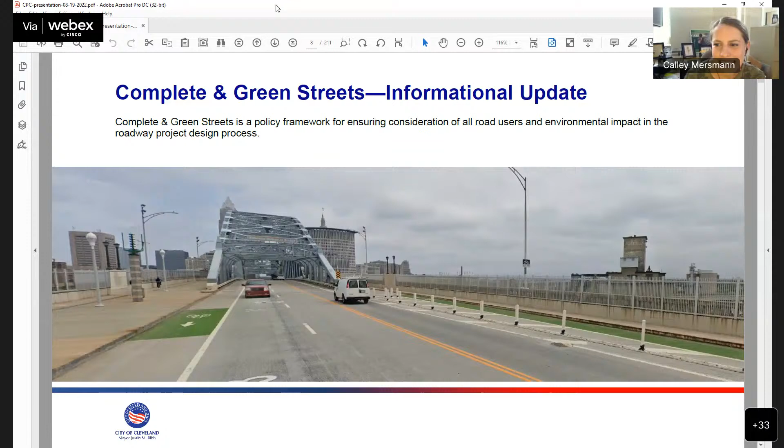So this reviews the elements. Go ahead to the next slide.

Madam Chair, I'm not seeing the slides. It must be you because I see them. I think everybody else does too. Anyone else? It might be just a setting from how you're viewing it. Okay, thank you.

As a continued refresher, the main change in this updated process is that we're bringing conversations about desired project elements and an interdisciplinary review process to the front end of the process. This is before project scopes, budget, or funding strategies are set in stone, which allows us to consider desires and determine what can realistically be accommodated in projects.

This process also adds transparency and understanding through advisory committee input. That's the TAC review that you see in the process. We'll be publicly posting any exceptions to TAC recommendations and reporting on outcomes at the end of projects. You can go to the next slide, please.

Rick mentioned the interdepartmental conversations we've had over the last two months since the legislation was passed. Using insights gained from these staff discussions and the direction established in the legislation, the directors of capital projects and city planning have posted a first version of our Complete and Green Streets administrative policy to the city planning website. We plan to review that policy with the TAC when they are convened. At this point, it's considered a draft, to take in their recommendations as well as continue to build on this policy as we develop and initiate the new process.

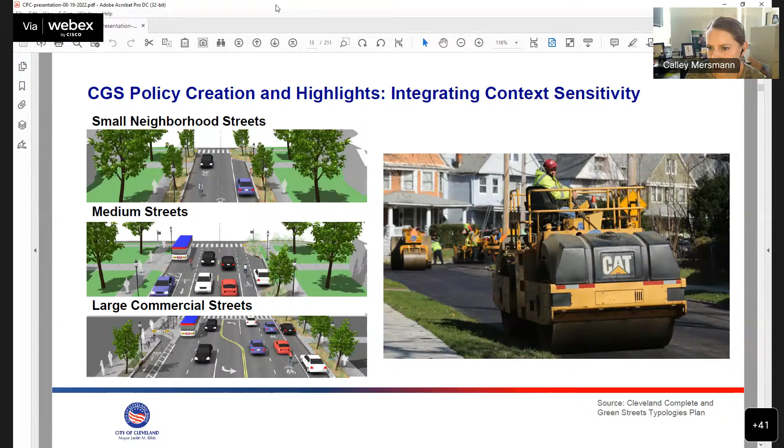The Complete and Green Streets policy in its draft form identifies roadway projects on collectors and arterials as where we have the most opportunity to see transformational complete and green streets elements. These are the streets that tend to be transit priority corridors, the ones where we want to see enhanced separated bicycle infrastructure, where there tends to be the most pedestrian volumes and the most serious safety concerns in terms of our Vision Zero analysis showing serious injuries and fatalities.

So our strategy here is to leverage the limited local dollars that we have for state and federal funds that can cover our objectives and enhanced elements we desire. What we've discovered through this process is over the last 3 to 4 years, Cleveland has had between $16 to $24 million of local funds annually to invest in our roadways. About half of that, or 12 million, goes to residential resurfacing that I just talked about. So that leaves us with an average of $5.7 to $6 million in local funds each year to leverage for these state and federal grants.

So having conversations early helps us inform project scopes, develop funding strategies, and try and leverage those dollars as much as possible to see the elements that we wish to have. Next slide, please.

So this is the final slide, just with some highlights from the website. We would love for you to go and nominate residents. I do want to say that this updated process mostly impacts projects going forward. So street projects that are already under design with set budgets or approaching construction, our opportunity to make adjustments there is very limited, but we look forward to implementing this improved and new process for projects going forward.

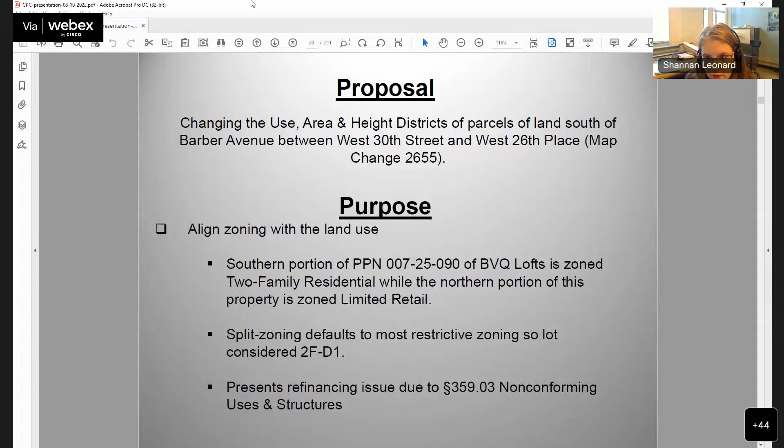So the entire lot is actually considered two-family D1. And this presents a refinancing issue due to our non-conforming clause in 359.03 of the zoning code.

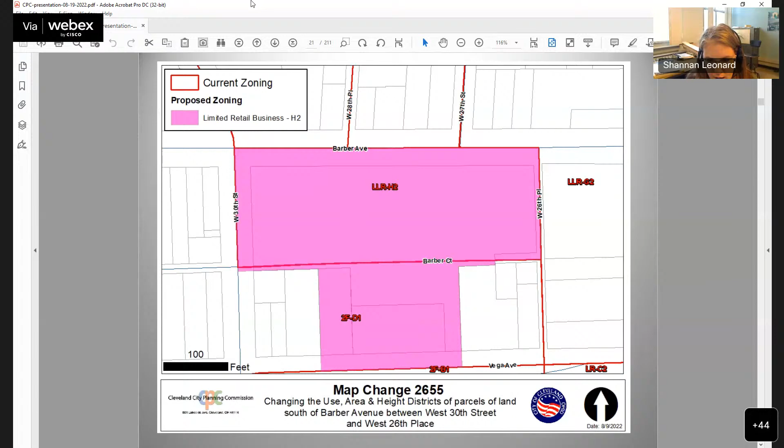Next slide, please. This is a really simple rezoning, and I'll walk you through the history of it that came to me through Councilman McCormick's office and Mr. Beckham, who is in charge of the Queen Barber Vega lofts. They are having a financing issue because the zoning is defaulting to two-family, and they had redeveloped this historic bakery into multi-family loft apartments a few years ago. Now they're struggling to actually get refinancing done. So we're proposing to make the entire lot limited retail business north of Barber Court, which has now been vacated.

Next slide, please. As you can see here, this is the current zoning. To the north of Barber Court, which is now vacated, is limited retail, and to the south is two-family D1.

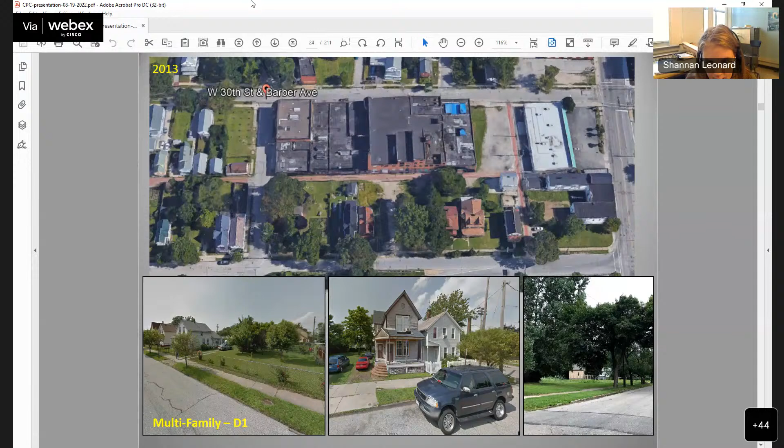This was what it looked like back when we did the rezoning in 2018, 2019, as well as what the building was -- vacant back in 2013. This development group came in and redeveloped the building and put in apartments at this location.

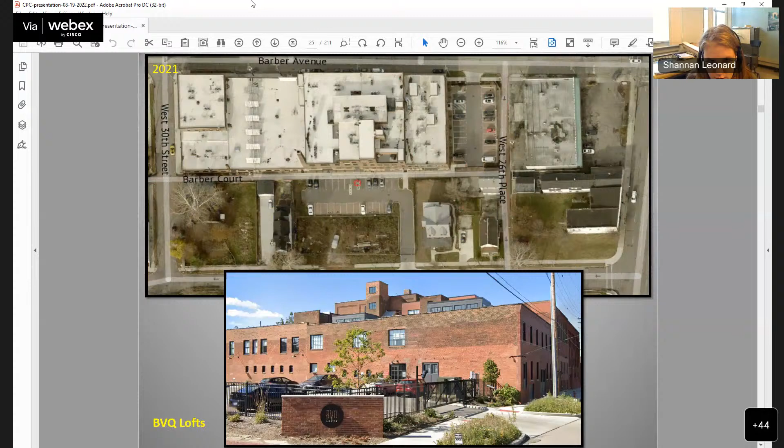Next slide, please. This is the current conditions in 2021. These are the BVQ lofts. You can see they redeveloped the building into a multifamily. Next slide, please.

Next slide, please. This is the proposal. We're proposing to change the two-family area to match the limited retail to the north, so that Mr. Beckham and his group can get the refinancing they need for this location. You'll notice the 4 parcels immediately east of West 30th Street are owned by Mr. Kennedy. I spoke to him on the phone. He was notified, as well as Miss Rosa immediately to the east, as well as the properties two properties past West 30th Street -- all were notified of this proposed rezoning just to align the land use.

Thank you. Is anyone here representing the property owner or the councilman or anything like that?

Madam Chair, this is Ben Beckman. I'm joining by phone due to some computer trouble. I don't know if you can hear me. I represent the developer group. I'll be brief. I want to first thank you and the commission for the time. I also want to thank Councilman McCormick, his assistant Katie Huff, and Shannon Leonard for tremendous support in getting this before you quickly. We really appreciate that.

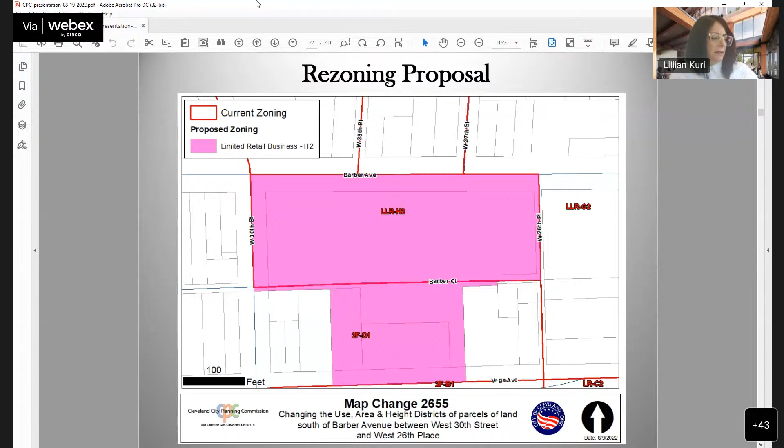I think then the next item is lot split and consolidation for permanent parcel number 002-05-030 and 031. This is at West 73rd Street. Joe, are you here to speak to this?

Yes, I am. Good morning. How are you? Very good. Thank you. Good. All right, so I'm actually in the video. Perfect. Good morning, everyone.

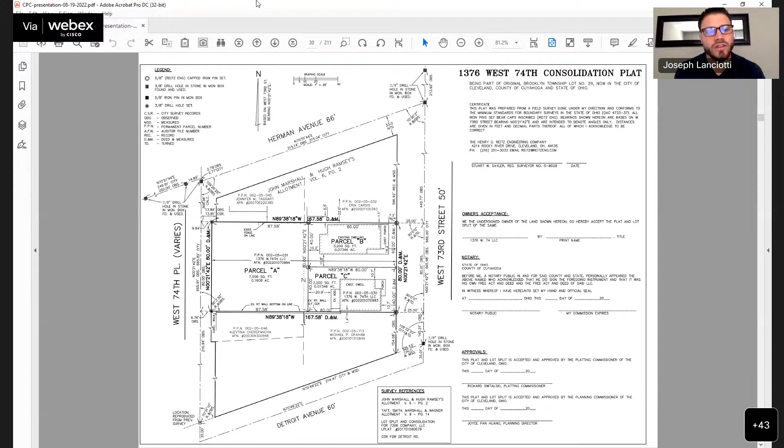So what we did here was, if you could see on parcel C, that is a single family home that we had purchased. Parcel B is a duplex that had an L-shaped lot with an 8-car garage on parcel A. What we did was we tore down that 8-car garage and we're looking to get a subdivision to redevelop that 7,000 square foot lot there. It actually makes the parcel of the duplex, parcel B, a little bit smaller, which is why we are here today. So that is the aerial view. That is the 8-car garage that we had removed.

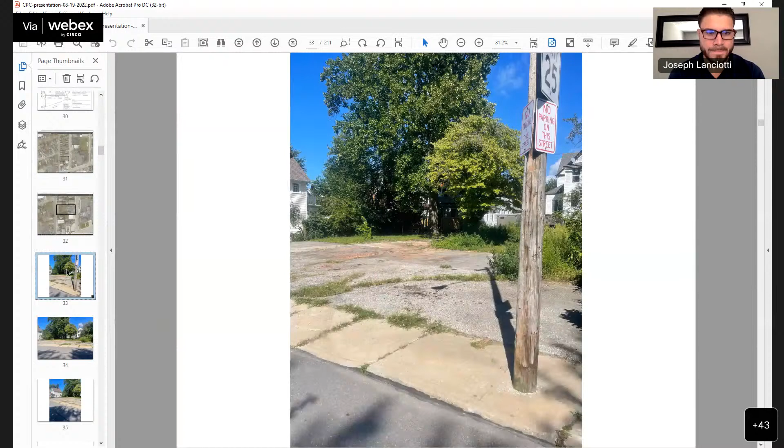Can you describe, though, for the two existing houses where their driveways and parking will be? Sure, the two existing houses, it's actually a shared drive. It's a very wide shared driveway. Nothing will really change there. And where do they park? Right between the two houses here. It's a shared driveway for the duplex on the top, and then the single family on the bottom.

What we are proposing is a 4 townhome development with adding a shared driveway in the middle of that as well, which is going to be called West 74th Place. That was actually proposed a while back. Have you created or submitted the requirement we have, that you sort of deed for the two existing homes the maintenance and access on the shared driveway, and snow removal, et cetera? Has that been done?

No, it has not. Well, this currently is not a shared driveway. There's actually a parcel line there. So there are 2 driveways that butt up against each other? Yes. How wide is each one? Each one, I believe, is around 10 feet wide. So it's not a shared driveway? No. Okay, confusing. So, yes.

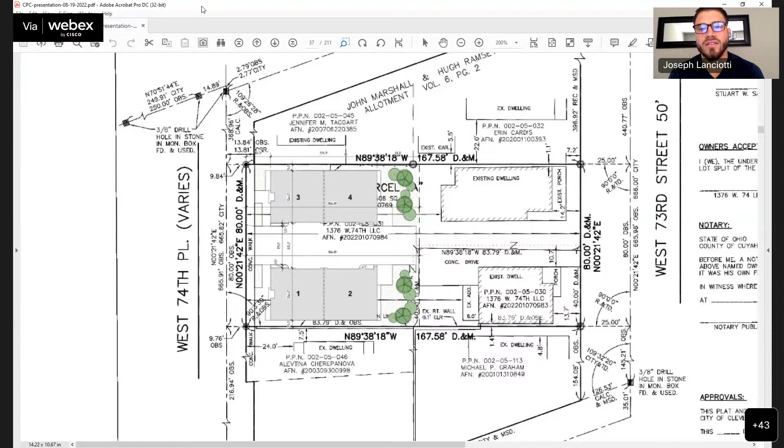Thank you. And is this also using the townhouse legislation? Yes, we will be going through all of that. We're just still in the process of trying to get everything completely off of this duplex, because it's currently one parcel, it was one L-shaped parcel. So we had to actually tear down the garages prior to seeing exactly where we'd put all the lines and everything.

Okay, I think it makes sense. I'll be honest, I think a lot more work should be done in terms of the site plan that makes sense to us. I'm sure you're going to come back. Pedestrian access to the unit 4 and 2 - there's a whole host of things in the townhouse code that I think you need to work on and detail out that I don't see here.

I would say if commission members are going to make a motion, it should be with clarity that the site plan itself needs a lot of work and needs to come back. Madam Chair, therefore I will move to approve presentation as submitted, with the caveat that the applicant work to come up with a dignified and engaging way to separate the two drives, with the intent of providing safe passage for pedestrians.

I'll second that. A motion and a second. Any other comments or questions? I do think you can work with staff, they're really good and they'll help you. I would suggest working with the planning staff as you proceed. But I know you need this to be able to proceed, so we understand that.

Okay, anyone else? Okay, well let's call the roll. Downing, yes. Fluker, yes. Curry, yes. McCray Scott, yes.

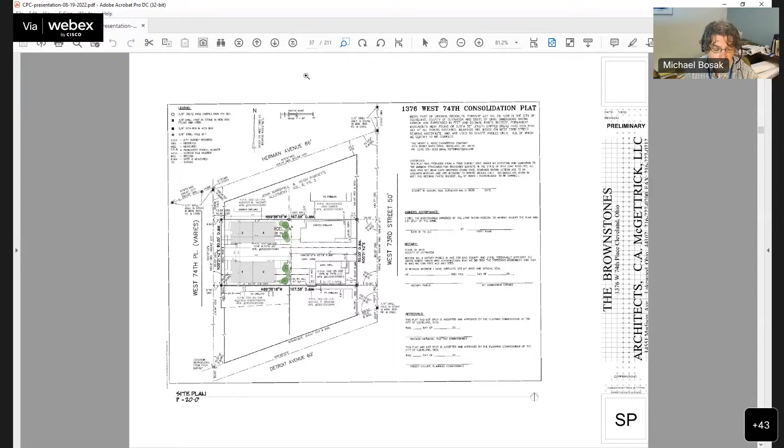Okay, motion carries. Diane, you must be inside something with a really big echo. I don't know what it is. I apologize, it's okay.

Southeast Design Review. This is T-Mobile new signage at 4071 Lee Road. This is seeking final approval. I will note that the Design Review Committee disapproved this unanimously - it did not meet the standards of the Lee Harvard Plaza sign and guidelines that were adopted by the Planning Commission.

I will ask first who's speaking to this matter, everyone who will be speaking, Kathy and everyone else, because I'm going to swear you in. Who's here to speak to this matter? Kathy Clark. Anyone else with your team or just you? No, just you. Do you swear to tell the truth, the whole truth, and nothing but the truth, as you shall answer to the penalty of perjury? Yes. Director, would you like to let the presentation go first or make any comments?

Yes, let's have the presenter go first. Thank you. Go ahead, Kathy. Maybe you could focus on what you think the local design review, what elements did or did not meet the guidelines. The only element that did not meet the guidelines - the size is fine - it's just that back when they did the building, the first sign plan required channel letters only. So that was why they disapproved it.

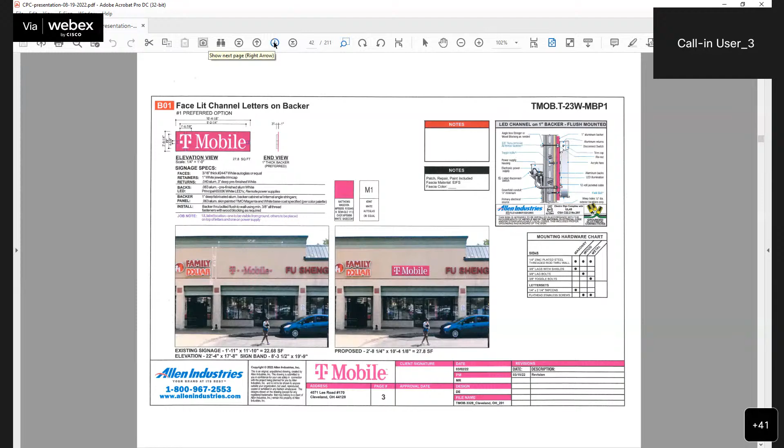Okay, Commission members, any comments or questions or thoughts? Madam Chair, I apologize to interrupt. Marka Fields, Assistant Director who's still overseeing Southeast Side, has her hand raised. Okay, thank you. Go ahead, Marka.

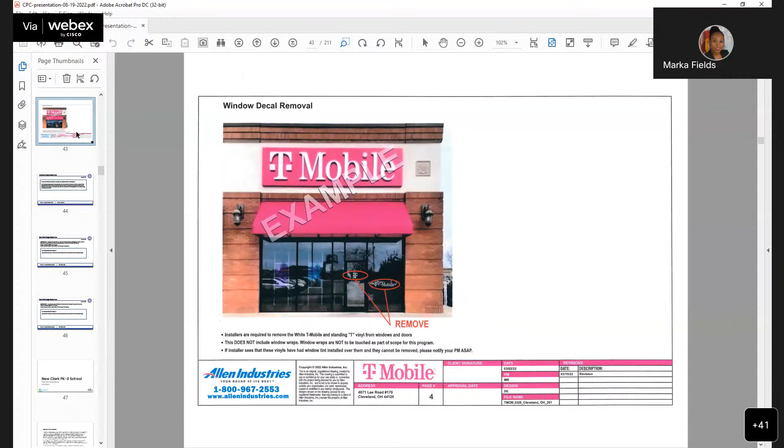Yeah, so in regards to the Family Dollar sign, that one I think was given a variance, and the reason is because even though they weren't individual channel letters, they were kind of cut around the letters so that it kind of mimicked the feel of individual letters. So they did approve that one. That was approved by Planning Commission, I forget, several years ago. But I think what they're trying to prevent is having several different sign types within the plaza.

If you look at the plaza next door, which I don't have a picture of right now, everybody has a different type of sign and there's no consistency throughout that plaza. They're trying to prevent this one from doing the same, which is why they said no to the sign that they're presenting, because it actually looks a little bit more like a cabinet sign. Thank you.

Anything else before we open it up to the commission? Have we heard from the councilman? We have not. Okay, commission members.

I guess, and again I'm not trying to re-engineer this, Madam Chair. Is there a way to do this without having the backer board? In other words, can they apply something to the backside, like a film, to the actual wall, and then attach the channel letters so they stand proud and appear to be? I don't want to contradict signage requirements, but I think there's a solution here to achieve it, and I don't think this is it.

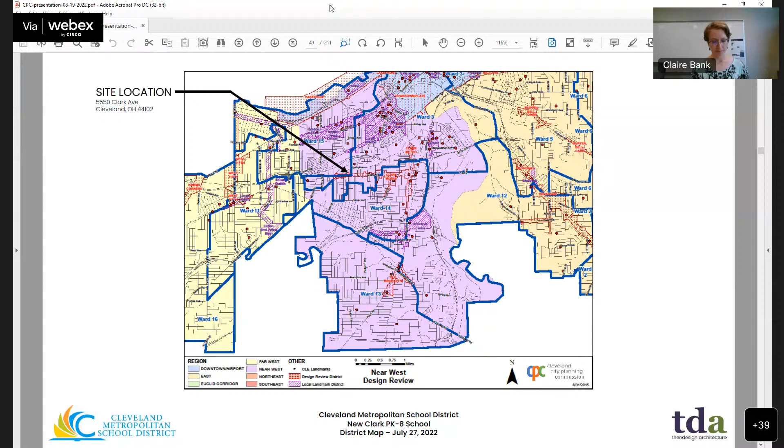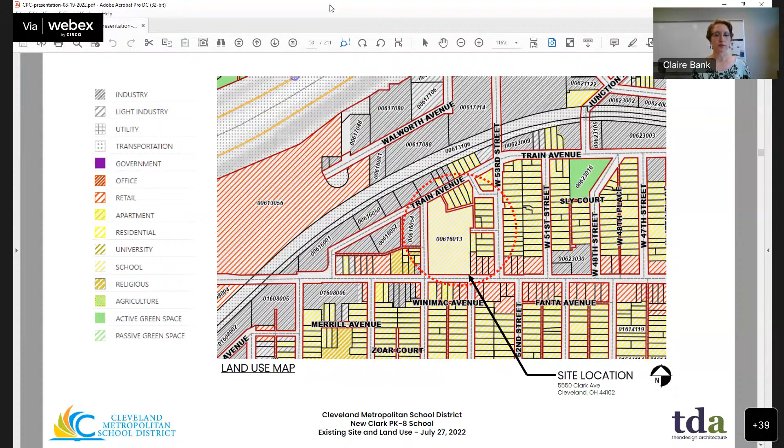Zoning is zoned for both 2-family residential and retail along the frontage, circled here in the red circle. Along the front of Clark Avenue, there is a retail overlay, and we'll show how we responded to that and some of what we did in response.

I know it's text heavy, but I also knew you'd have it before, so I apologize for that. There are a few things on our radar we know we'd need to draw attention to, as far as items that are a little different in our response than the retail overlay. One is setback from the right of way. We know the max setback there is 5 feet. We're holding back 12 feet in response to a planned multi-use trail that some of the city planners made us aware of.

There's also a higher percentage of glass if you're really looking at retail use versus a school than what's safe to provide in a school setting, so we will show what we did there. The main entry was placed where it is for a good reason, as far as site circulation and where students and staff will be coming from. That was one item design review also asked us to investigate more as we move forward, addressing the street a bit more. We've already planned to seek conditional use since it's been a school for a long time, but zoning doesn't align with that.

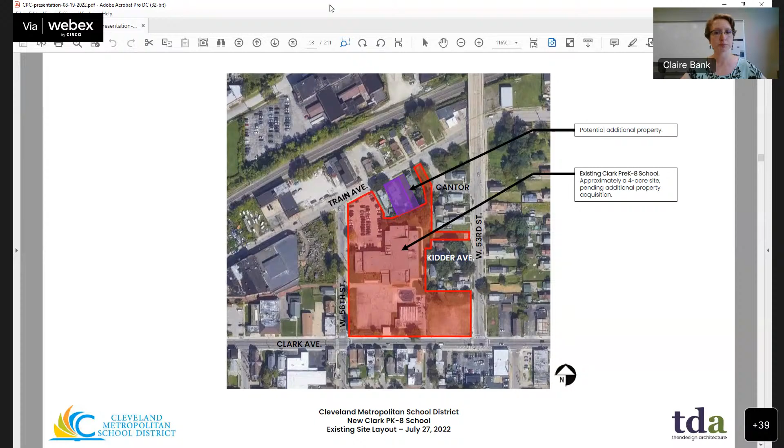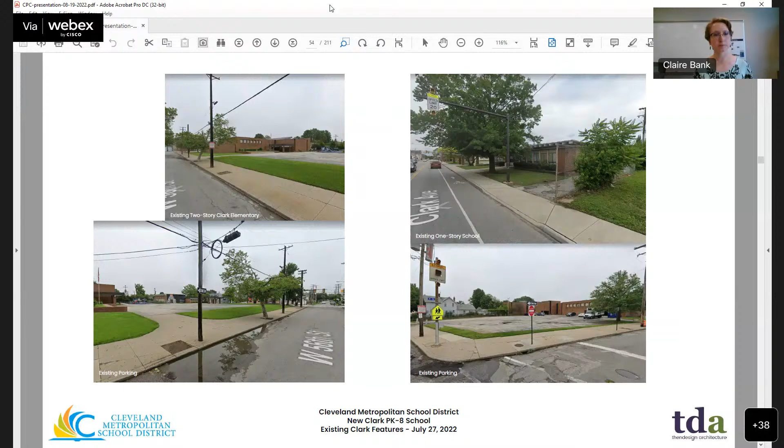These are just views of the existing building. On the left, two images, you can see that paved area and the school in the background. The paved area is also where the old Clark, before this current Clark, sat. So we're doing some additional geotech investigation there to see if anything is living underneath that paved area. And on the right, you see an image of the annex building and also the parking lot in the back.

You can move through a little bit more quickly than design review. Okay, we trust them. We just really need to see the whole thing.

So then this is the proposed site plan. To walk through it fairly quickly here, the driving factor was putting everything in the right adjacency for interior and exterior programming. So one of the first things that drove where we placed the building was that retail overlay along Clark Avenue and defining that street corridor along Clark as you go towards Cleveland. So we placed the academic bar towards Clark because that's one we can really activate more with how we place the fenestrations, and we can break up the scale of the building there, but also define that street edge.

If we put the gym there, that's a little bit too blank of a facade. And if we do food service or something else like that, we start getting mechanical type uses along the front, which we didn't want to do along Clark Avenue.

There's a lot tied to interior programming. So the pre-K and K play area has to be attached to the pre-K and K classrooms. The larger play area has to be attached to student dining. So those types of exterior programs landed where they did in relation to the interior program on site.

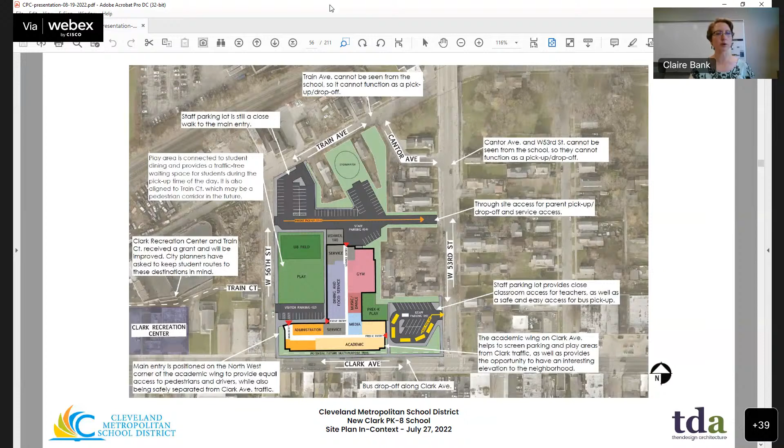The main entry, just to draw attention to it here, is facing north. It's facing towards where the visitor parking is happening, where all the student pickup and drop off is happening, and where staff would be coming from. But staff would also have keys and could use other doors to get in and out of the building.

Next slide. This one we can kind of jump over—we just talked through it on the last one.

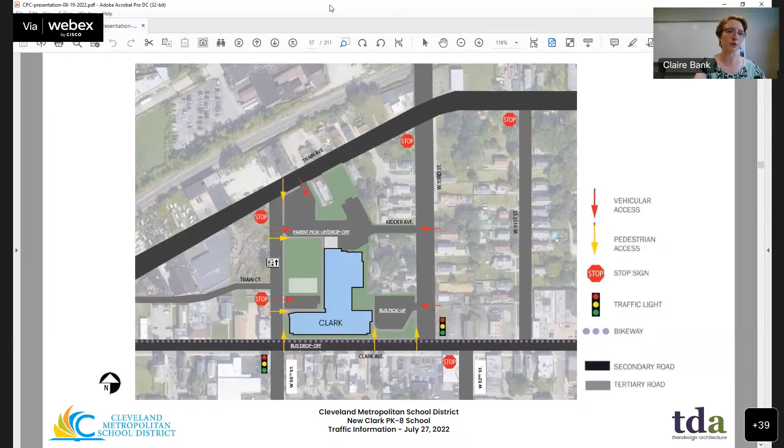These are just the floor plans, we'll go through them quickly. The main thing is you've got a 3-story academic wing along Clark Avenue, and all the programming in that northern bar is meant to also be used after hours by the community—student dining, gym, and media center—and it's totally sealed so you can easily close it off from the academic wing for security reasons after hours.

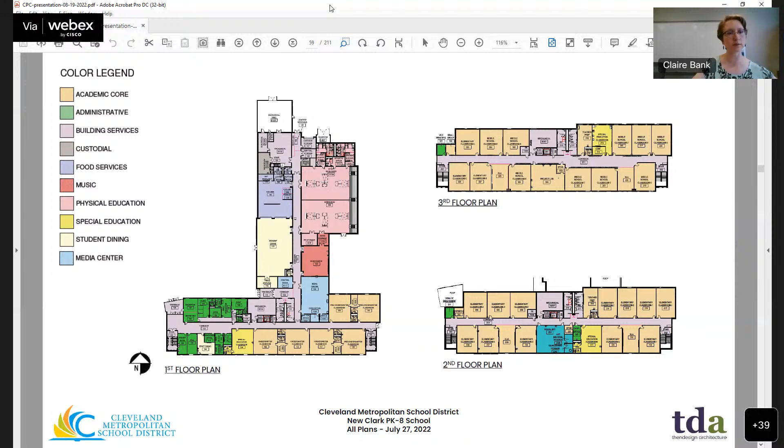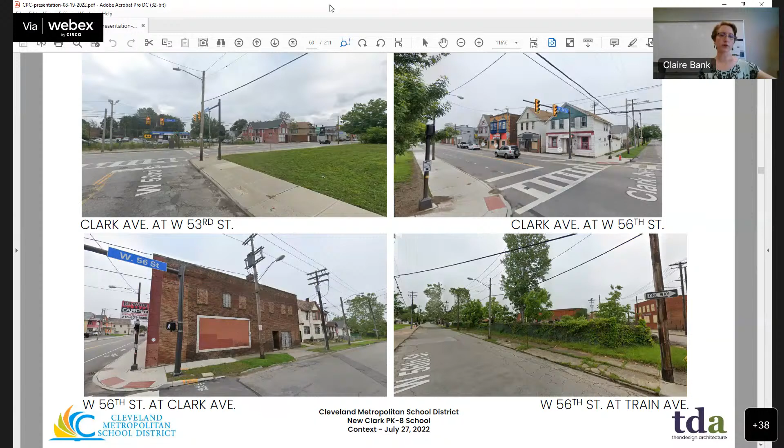Next slide. This is just context, so you can see what's surrounding the building. There's a lot of different materials and colors around the site. On the school itself—we didn't include images of this—there are a couple existing murals, and the principal has a good relationship with a graffiti artist who has done some really neat pieces within the school.

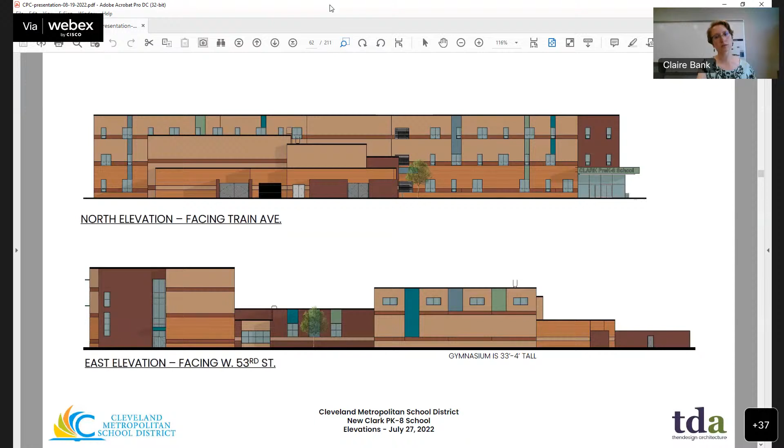One more slide—this is looking at the northern elevation. Here you're getting a clearer view of the main entry and visitor parking, and a glimpse of where the play area is. In the middle, where the two buildings meet, that's more of an event entry—so if something is going on after hours, that's where people would go in for use of the gym, student dining, or the media center.

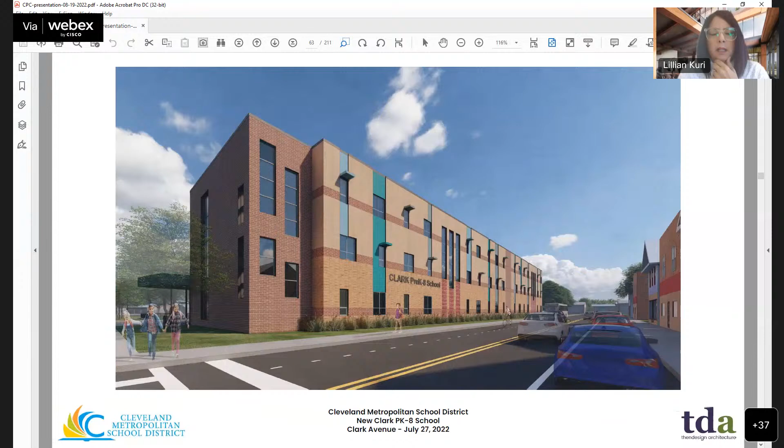Thank you. We're going to take two motions—one for the demolition, and the second, it says on my agenda, is conceptual approval for the design. Is that correct? I'll leave it to commission members if they're comfortable with the design, or if they want to leave final approval to local staff. Let's see, the director has her hand raised first, so go ahead.

Thank you, Madam Chair. As the applicant discussed, this will need to come back for conditional use approval for the PRO—that was an administrative oversight and should have been posted as such. So the applicant will need to come back at the next review for conditional use approval. And the conditional use is for the drives?

If I could have Shannon unmute and speak to the PRO, that'd be great. Yes ma'am, Shannon Leonard. So from what I can see here, they would need a conditional use for the institutional use and a pedestrian retail overlay, and also for the no main entry on the pedestrian frontage. I believe those are the two. I didn't see a driveway across a public sidewalk, but it may need that as well. I haven't done a formal PRO review here.

Okay, they'll need to come back to get the conditional uses. We normally take the PRO first and or in tandem with the design. Right, so okay, well I mean I think we have some latitude. We can also leave it to staff unless you can't come to agreement on the PRO as well. But first let me hear from the commission members about the design or any questions or concerns.

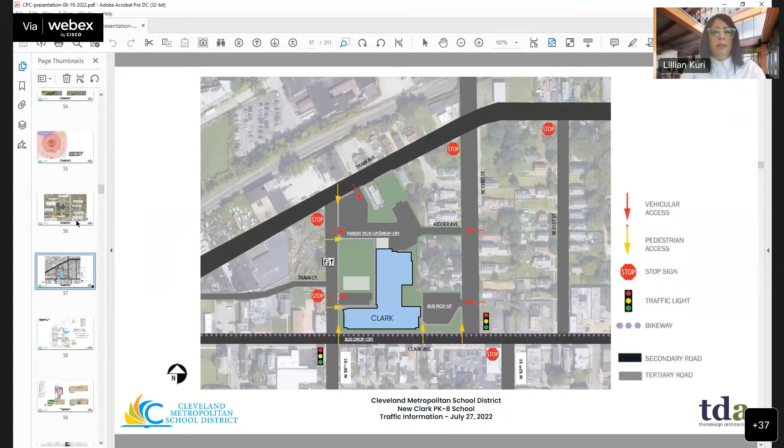My sense on the design review, the conceptual design review and the PRO, is that we ought to do them together. If we're comfortable, they're not going to change the orientation of the building if we give them conceptual approval and the program. So to my commission members, either we address some of the issues now, or we may move the design and have them come to staff for the rest. So I'll leave it up to you, or see if there are any questions about that.

Anyone have any design concerns or anything they'd like to raise? Okay, so can I have a motion on the design portion?

Madam Chair, I guess I'm not totally clear here, if I may ask a question of you, about what we should do. PRO and design, if there's something that needs to change, or if there's a variance required, then they would have to come back, and this may impact what we see here, correct? Well, what I'm saying is we're comfortable with the way this is sited and the design, right? How it faces Clark, and how the entrance is sort of off 53rd at the corner there.

The main entrance, not completely facing Clark, which is part of the PRO. If we are giving conceptual approval to the design and the layout, in effect, we're okay with the variances that are required in the PRO, is what I'm saying. So we either have to table this and have them both come back together, or we like the design and we're comfortable with it, which in effect means that we're okay with the variances that are required by the PRO.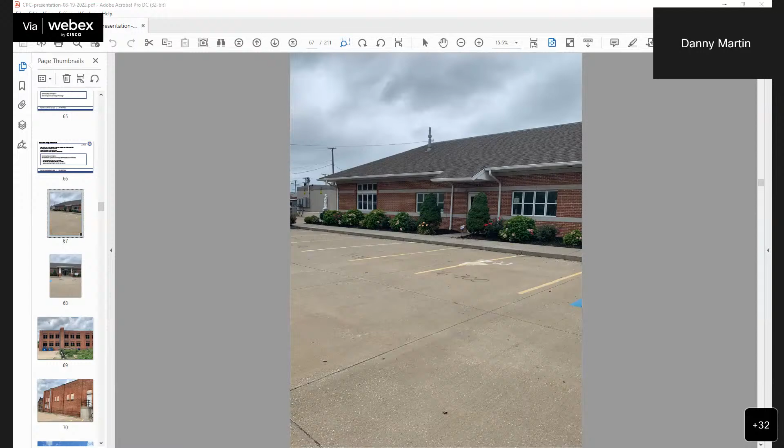Okay, so are these the images? So this first image is the existing pre-K building that will stay and that we'll add on to. If you go to the next one, you'll see the front of that building. I don't want to get into the new design, but if you keep going, you'll see the old school building. Here's the back side. You can scroll through it.

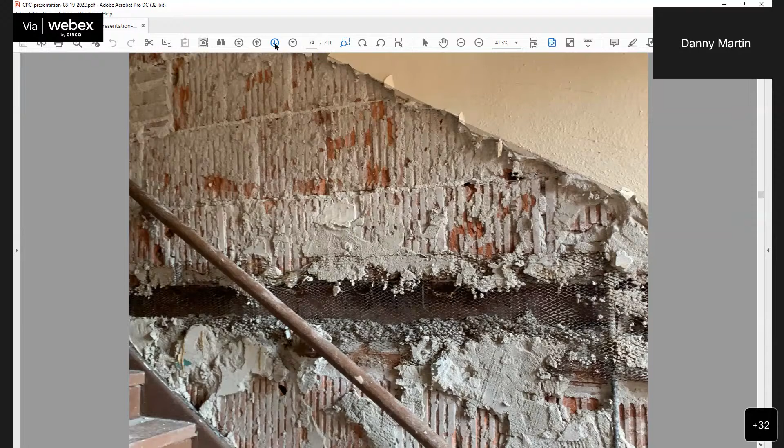So this would be the building that we're taking out. The way this building is positioned, it's right in the middle of the lot. So when we take it out, it'll really open up our lot to create more play space for the children, better situations for parking, for school drop-off and pickup.

As you can see, the damage is very extensive throughout the building. This is a 1930s style building.

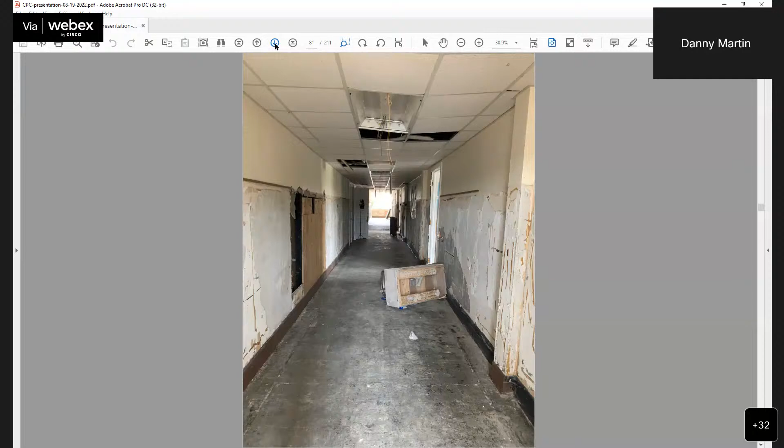I'll move approval on the demolition. Downing. I second, McCray Scott. Motion and a second. Any comments or questions? Okay, call the roll. Downing, yes. Booker, yes. Kuri, yes. McCray Scott, yes. Slife, yes. Motion carries.

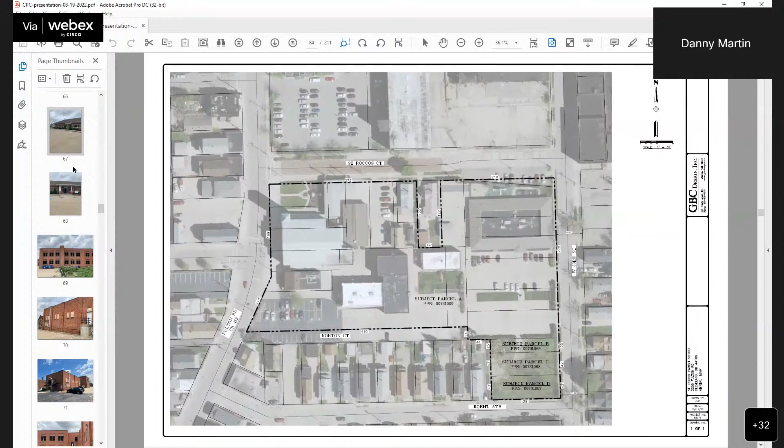Next item, is there another piece of this one? Yeah, so let's see, so this would be, all right, so for the schematic design, that was presented to the design review board. They had some additional comments, some changes, which we are working on and adding those in. I don't have those drawings available, but I imagine John will bring those back to you guys for further approval.

Alright, so I'm confused. Do we need to table this to the director then, since we don't have the drawings? I believe we do have the slides. Maurice, if you go further down past the demolition. So while he's doing that, this is the schematic approval, that's right, design approval. If you can go to the next slide, that's existing. Keep going. There you go. Thank you.

Does someone want to walk through this, or do we need to table this? Yeah, no, I can walk through the schematic design. I'm glad these are in here. As you look at the drawing, basically where the new parking is shown, kind of in the middle, that's where the old school is demoed and removed. You can see it really opens up the lot there. The layout then, up in the upper right-hand corner in the lighter tan, that's the existing pre-K building. And the darker tan color, that would be our new addition, including additional classrooms, the gymnasium, and the cafeteria. So that's the layout that we presented. It's just a schematic design. We're still working through a lot of the details to finalize that, but this was approved.

Okay, can you go back to the site plan for me? Any comments or questions from the commission? I have to be honest, I think that the West 33rd, the front facade if you will, from the street, is that 33rd Street that I see? I don't know the street well, is that a heavily trafficked street? No, it's residential on the other side of 33rd. The main entrance is off of Fulton. On the residential side, I guess my question, are those single family homes across the way there?

I do worry about the entire length of that wall along 33rd, if that is a residential street with houses and single family lots. As you go into the next level of design, there needs to be a lot more fenestration and care, since these are 40-foot Cleveland lots, and that's a pretty long, harsh environment with not much fenestration.

Yeah, and that was some of the comments from the initial design review committee too, that it's just a long, flat wall. So we've looked at, can we offset the new addition? What can we do with the facade to give it more shape and detail, just a little more pleasing to look at?

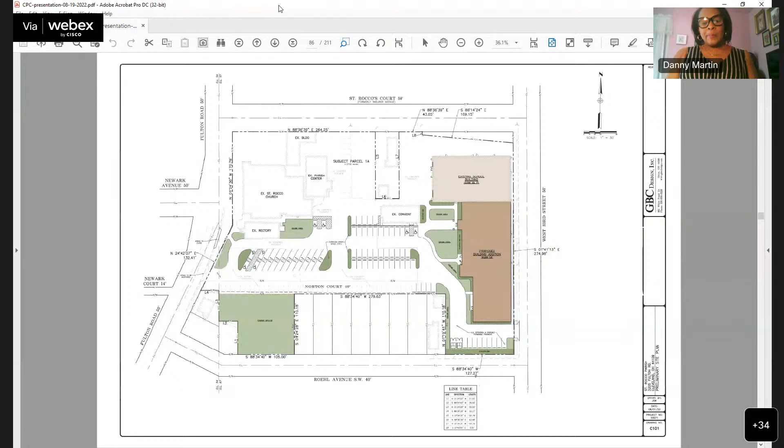I believe there is a side view. There we go, no, not that one. Is there another one that kind of shows any landscaping or sidewalk? No, we don't have that with us here today, but we'll look at the landscaping and look at that pedestrian walkway.

Okay, and come back with a little more context in the site plan that does show what's across the way there on 33rd. Very good.

Okay, Commission members? I think we have a motion and a second already, right? So, did we? No, no. Okay, do I have a motion?

I'll move approval incorporating the comments from design review and also the comments from the commission about the frontage on West 33rd to soften it with landscaping and other elements. Second. Motion and a second.

Let's call the roll. Madam Chair, if I may, procedurally, could the member clarify which part of the motion they'd like to include from the discussion of the members, being more specific in the motion would be helpful. Thank you, you're talking about?

I move schematic design approval with the conditions of adding more glazing to the West 33rd frontage, increasing the articulation of the West 33rd facade, and proposing detailing the facade with different materials.

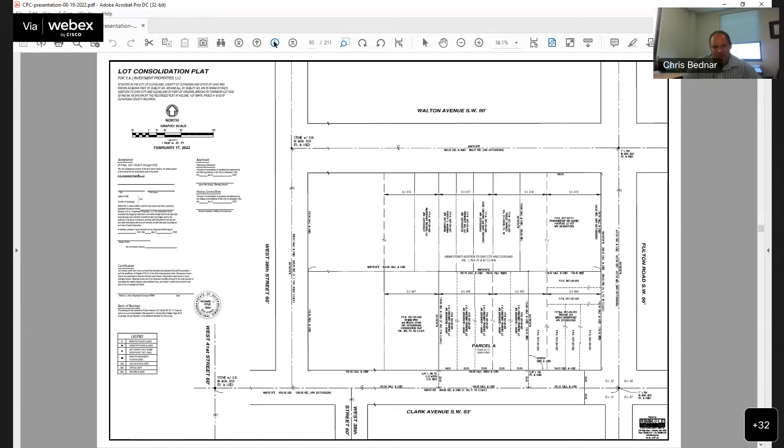The challenge is that Taco Bell, like most fast food places, has a limited type of floor plans they provide. There's a lot of operations management put into the thought and layout of these restaurants. We've looked at various iterations of trying to get into the spirit of the new form-based pedestrian urban frontage, and we believe we have a site that gets close to meeting the objectives.

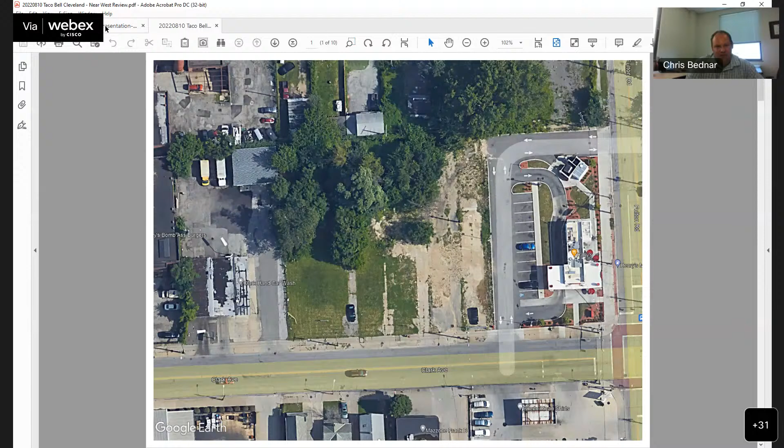The building itself is located about 10 feet back past the right-of-way line. We started with the code point that all drive-through interaction has to be located out of the pedestrian frontage, which is where we placed the center of the drive-through window. If you can see on the west side of the building, there's a box that sits out in the drive-through lane—that's the location of the drive-through window.

So we placed that interaction point on the 45-foot setback and then worked with the building from there. It pushed the building back past, I believe, the 8-foot setback line, which is the minimum or maximum setback for the frontage of the building.

This type of layout tries to meet those objectives as close as possible, providing a building that's up near the frontage, near the public sidewalk, which helps allow for pedestrian access in and out of the site. We did look at alternates to rotate the building, but it just doesn't fit on the site.

The challenge is it puts the parking way in the back, doesn't make it easily pedestrian friendly, and doesn't meet corporate Taco Bell's concerns about pedestrians potentially crossing drive-through lanes from a safety standpoint, as well as ADA concerns—it puts the parking spaces a significant distance away from the entrance.

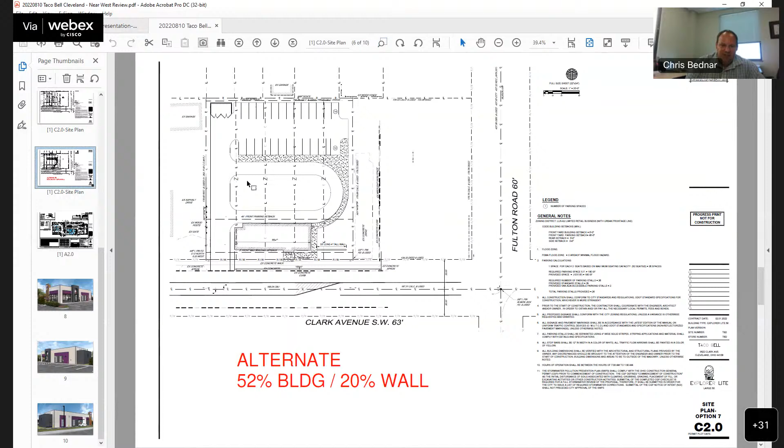If you go to the next slides too, or back to the alternate there—rotated 90 degrees, it puts the majority of the building that's along Clark Avenue with just a blank wall space because of the location of the restrooms in the building.

If you look at the current floor plan, the dining room space, which has all the glass glazing to see into the building, is located on the left-hand side of the building up front. The back-of-house operations—kitchens and restrooms—are located on probably a good two-thirds of the building, which do not have windows.

That was another thought—having this building up along the right-of-way, turned 90 degrees—but it wouldn't work because visually it's just a big blank wall, with some decorative material along it to help lighten it up.

But the site is a challenge to meet this form-based code, and we would be interested in coming in to obtain variances, possibly for the 80% principal street frontage build-out, as well as the hours of operation.

Our property does abut a residential district for 5 properties behind us, and then it jumps back to the retail district behind Rally's. Our restaurant is looking to have hours of 7 a.m. to 1 a.m., and I believe the current code when abutting a residential district caps it at either 9:30 or 10 p.m. maximum. So we're looking to have a variance for extension of hours of operation for that.

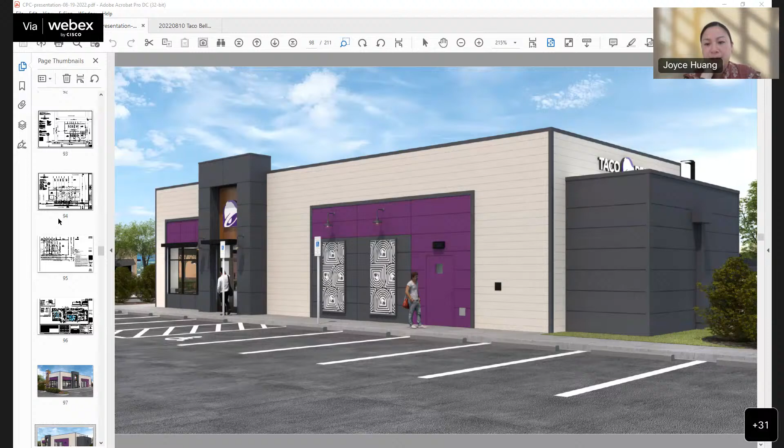This covers over 5 parcels, and really the urban form overlay prohibits suburban style autocentric development. This was identified through the Clark-Fulton Together plan, along with the residents, that they wanted more of an urban form. There are other specifics I can get into regarding glazing, or we can discuss the 80% build-out frontage more, but overall we feel that from a design perspective, this does not fulfill the urban form overlay district goals.

I believe part of the challenge is we don't have a building that meets that objective of getting out of the 166-foot frontage. The 80% requirement needs a building about 100 feet wide against that frontage. Really, the only potential use for this parcel would perhaps be a retail strip mall type building with 3 or 4 businesses, but then you wouldn't be able to have enough parking in the back to meet those businesses' needs for the full 80 or 100-foot build-out across the frontage.

So that's the challenge we were having with this site - our clients are franchisees working within the Taco Bell corporate guidelines, and they just don't have a building that's wide enough to meet the code based on that.

Commission members, any other questions or comments? Madam Chair, two comments. The first is it would be nice to have context in these presentations. When you start referring to residential and what you abut, I have no concept of what you're talking about.

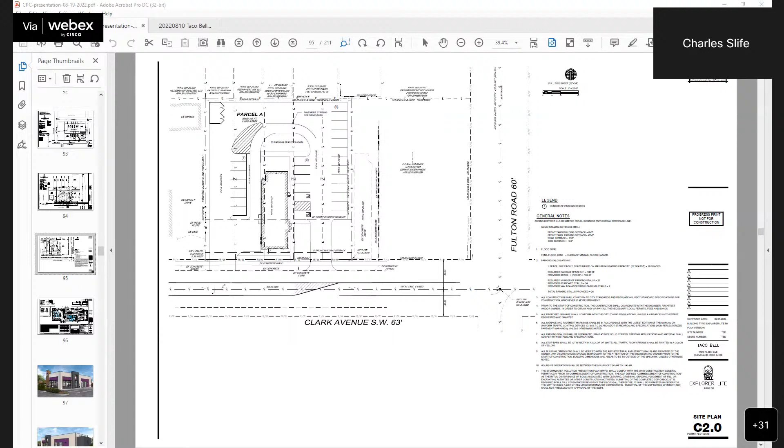Madam Chair, to the applicant, you're trying to fit a square peg into a round hole. What you're telling us is here's a corporate model, and if it doesn't fit, we want all these variances. Why not change the corporate model? That's not acceptable, at least not in this neighborhood as it's designated.

Correct. To answer the previous question, the site is typical of Taco Bell sites we work on in other communities. They're typically under 1 acre and more of either a rectangular or square type site. The challenge is having 60% of the frontage not part of a building, to meet that objective.

I don't even know if we took the restaurant's back operation and moved it up to the front corner, if we'd still have the amount of space. We could take another look - maybe the parcel doesn't need to be as wide, and we could split off and not include all 5 properties into the consolidation. Would it be potentially possible to have a reduced parking count as a variance if we could get that urban frontage across the front with the building and the wall to make it work with the smaller width of the lot?

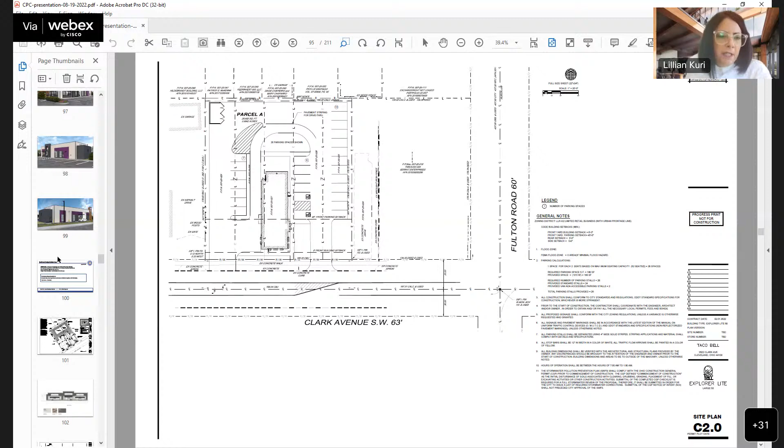Okay, next item. Northeast Design Review Case 2022-004, proposed demolition of a 2-story mixed-use building. This is at 5925 St. Clair. No action was taken here. It was a split vote, 2-2.

Leon, are you here? Anyone else to speak to this? Yeah, Leon Sampat, Ellis Architects. I don't believe that 2-2 vote is correct. We went back to them with the proposed use of the lot.

Okay, hold on. Before you speak, let me swear you in. Do you swear to tell the whole truth and nothing but the truth as you shall answer to the penalty of perjury? Yes. Okay, and we'll ask staff to clarify that as well, but go ahead.

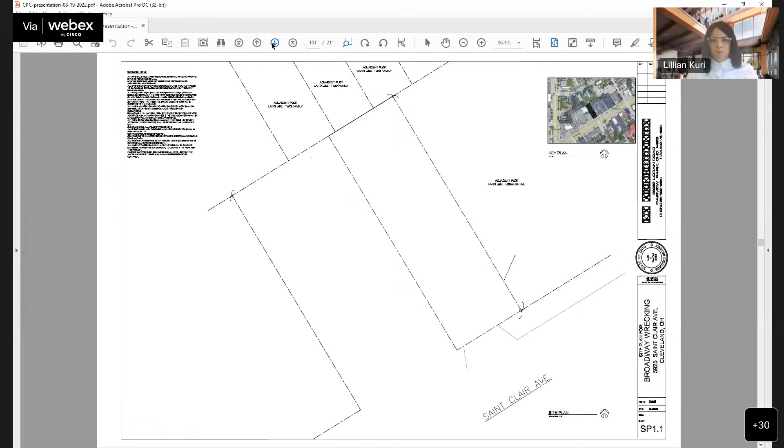So this proposal is really for the demolition of the two-story structure and the three-car garage at the rear of the property. Can you move the slides, Maurice? The building's in pretty poor shape, so this site plan was produced to show what the intended use is going to be. The current owner of the property to the northwest owns both parcels. His current use is a convenience store, and he's looking to expand his building onto this property to the east, which has the two-story structure.

And if you go down, I believe to the next slide, there's a photograph. Maybe one more. Sorry, one more. Nope, maybe one more. There's a photograph of the existing building, the three-car garage, and his building—you'll see a partial view of his existing convenience store. This is the structure we're looking at demolishing.

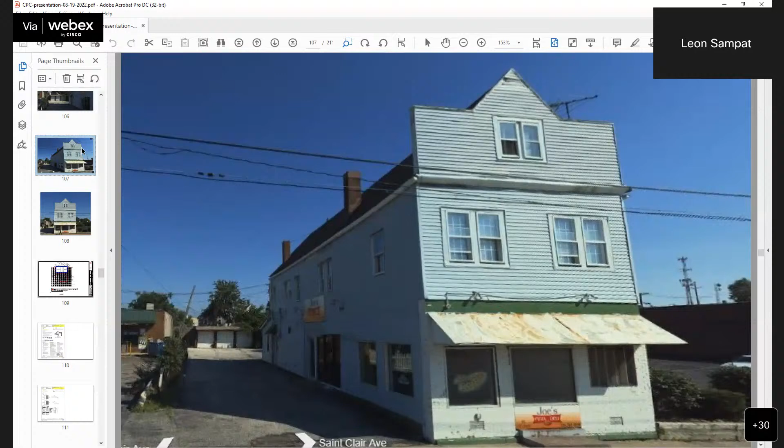Design review actually met them at the site. They walked the structure because they were hesitant on approving the demolition. Once they did walk the site, we did get approval on the demolition. However, they suggested that we come back and show them what the property owner's intention is in the next couple of years. So that was what we were passing through on the presentation.

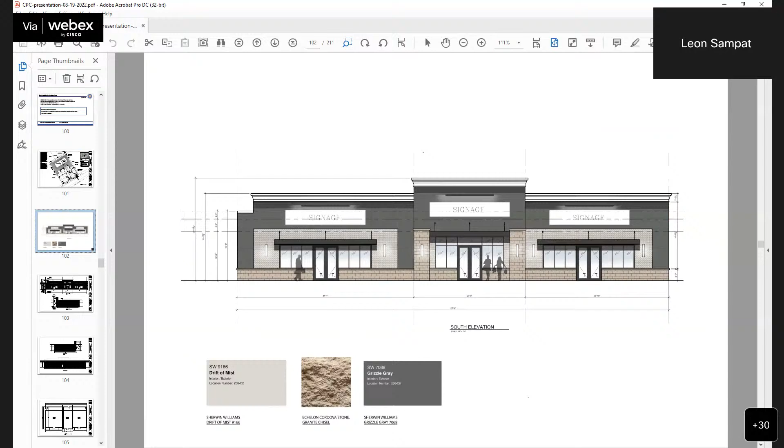If you go back to the second slide, the color rendering—this is what's proposed for the future once this property is demolished. This would be the expansion and reconfiguration of the existing building. But right now, we're just seeking approval on demolition. We're not even seeking conceptual approval on this plan because it's a few years out. But like I said, design review had asked that we come to them with that. They didn't want to approve a demolition without a conceptual plan presented.

Are there any internal pictures of the condition of the existing building? Doesn't look like it was in the presentation, but we did present that at design review, and like I said, they did walk the structure. It's not the safest structure, and they agreed once we met on site. That was the intention for the meeting—they did not want to approve this without going there.

Madam Chair, to the applicant—if I'm familiar with this area, most of the buildings sit right along the street, and this is sort of out of context. So you're tearing down a building that maintains the urban edge to propose building something that sits back and creates a sea of parking. What's the context here? I can't follow this.

So the current owner is looking at trying to expand his structure for his store. He was looking at creating a small coffee shop. As far as the existing structure, we just weren't able to incorporate that into his existing building to expand his business. Madam Chair, to the applicant, you're missing my point—what happens in and around, across the street, a block away, a parcel away? I don't know, it's hard for me to understand what you're proposing in context.

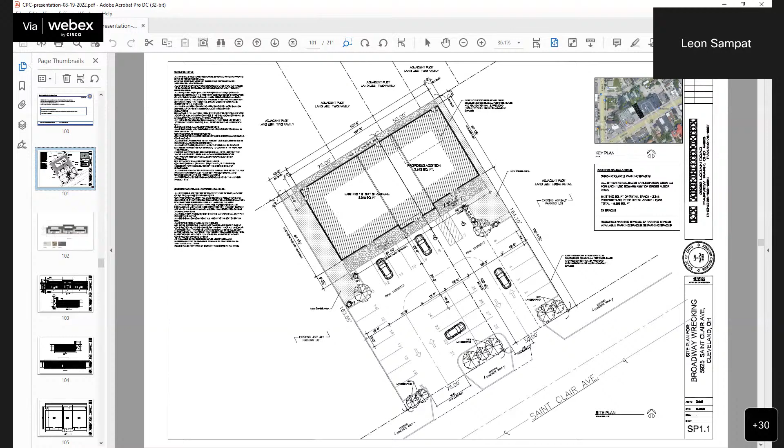Yeah, I do think we need that. Also, I think I heard you say there's no plan for this for a few years—this is just showing what might possibly happen. This isn't actually what they're going to do, right? Correct. They have issues with people sleeping in the building, so they wanted to demolish it as a safety concern. But they have no current intent to build what you're showing today, right away. No, they said the construction timeline given was between 1 and 2 years.

Madam Chair, to the applicant, my question is exactly as my colleagues'—so what happens between that 2-year period? Is it just going to be vacant land? Is there going to be landscaping? What's going to happen? They were planning on just filling it and planting grass, to be left vacant.

To the director, can you speak to what happened at the local design review, or at least with the planner for that district? Unfortunately, the neighborhood planner is out of the office today, so I'm not able to share additional context on what happened in design review.

I will share that... I see a note here. This was in Sharonda's area. The design review did approve the demolition, as far as I understand. Is that accurate? Just for background, the building itself has lost its integrity despite being a contributing building to the historic commercial area. So the council person, I believe, is in support of the demolition.

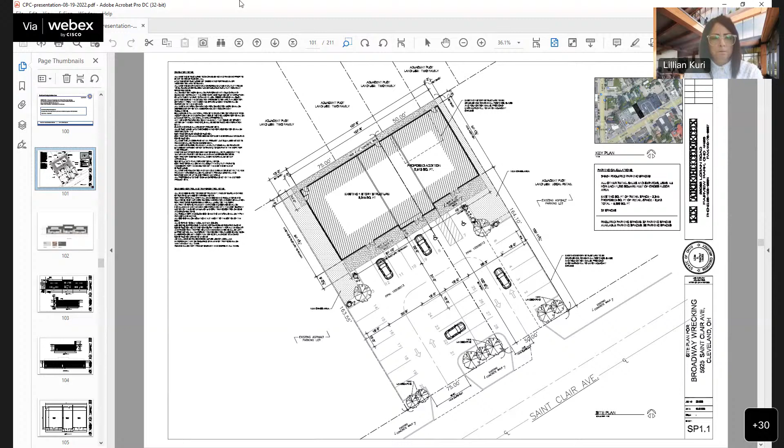This is Northeast Design Review, for East 66th Street and Lexington Avenue, between East 65th and East 66th. We have a few people here to speak to this. It's a very large group, so I'm going to do a group swearing in.

Do you swear to tell the truth, the whole truth, and nothing but the truth, as you shall answer to the penalty of perjury? I do. Yes. Yes.

I don't have any specific involvement in this case. I will remain and hear this, but I will likely abstain, so I just want to make note of that. But I'll still remain on the commission just because of all the work being done on East 66th Street and with many of these partners. Madam Chair, I must recuse myself.

Yes, you must. So let's continue and have you guys present this project. Thank you, Madam Chair. Good morning, everyone. My name is Cassandra Manna, and I'm representing the development. We had a few people who had to step off the call. We just had them on to answer any questions if they arose, but I'll present a little summary of this project.

Cassandra, sorry, one second. Just for my benefit, we have Charles. We still have four without me. So just out of an abundance of caution, Diane, do you mind sharing this and taking it from here? We'll still be able to vote. That's okay, fine. Madam Chair, just out of an abundance of caution, because I have so much involvement on East 66th Street and with all these partners, I feel better if August and I step off. I apologize, but Diane is a better chair than me, so she'll take over.

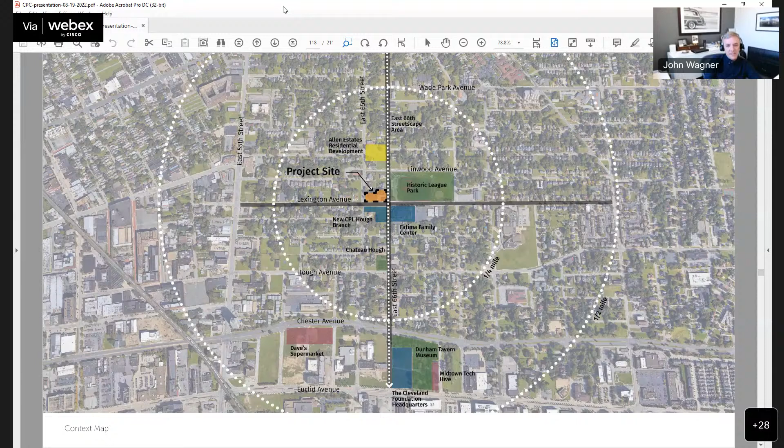Just a quick overview: the building is located at the northwest corner of East 66 and Lexington, shown here on the site plan. Next slide, please.

As Cassandra mentioned, the development is made up of 3 different buildings — 2 along Lexington. One is a 2-story commercial building, the other a 1-story commercial pavilion building that anchors the corner with rooftop access. The 3rd building, up East 66, directly across from League Park, is the expanded Baseball Heritage Museum space as well as the batting cages. Around the back along East 65th, we've tucked in the parking and created generous screening from the neighbor's homes, allowing the buildings to sit on the urban edge and respond to the proposed streetscape designs happening along East 66th.

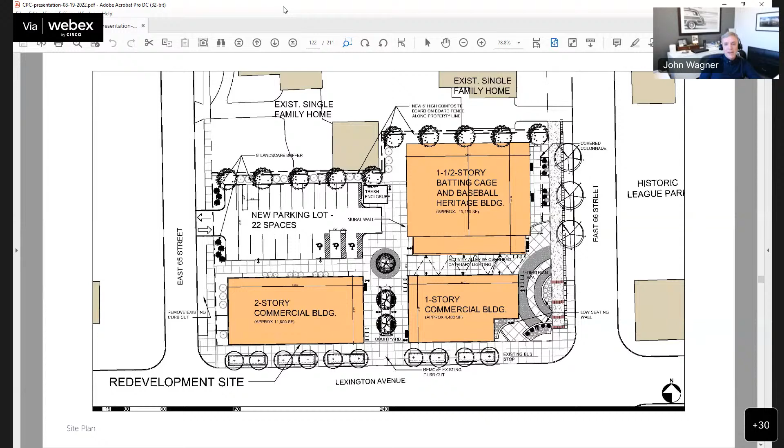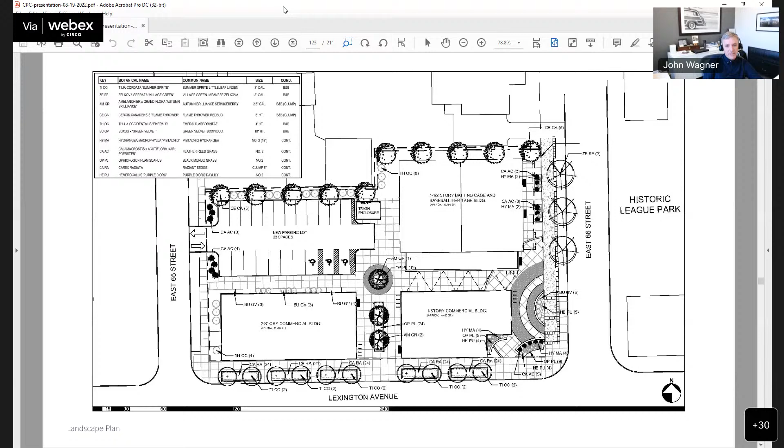Next slide, please. The landscape plan has evolved, incorporating shade trees as part of the Midtown and Hough corridor restoration of the tree canopy, as well as landscape buffers between the adjacent residents, ground-level planting, and a series of more ornate garden planters at the corner, creating a transit-waiting pedestrian environment at East 66th and Lexington.

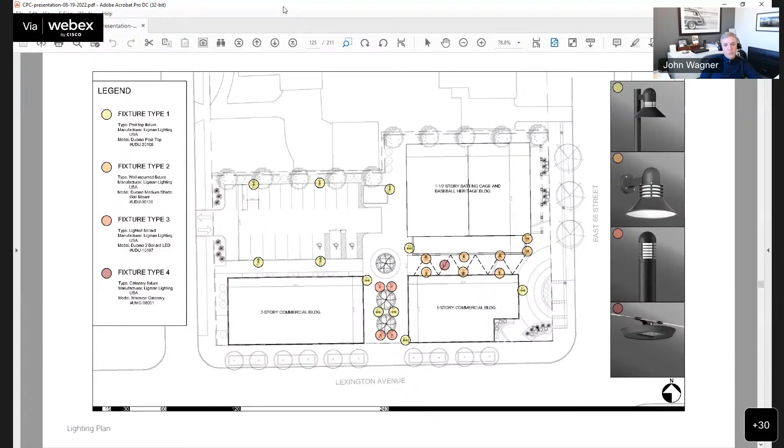Site lighting is important not only for the success of the development, but the safety of the neighborhood. We're using a mix of different fixtures, including pole mounted around the parking lot, wall mounted around courtyards, a few sporadic bollards for safety purposes, as well as cable lighting between the buildings, creating opportunities for outdoor seating for proposed tenants and neighbors.

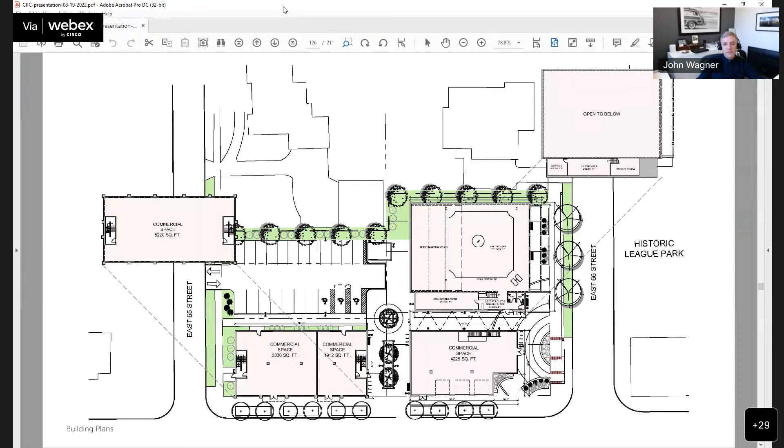Around the corner, the batting cage is a simple gabled building. It actually has a steel trellis along East 66th. I know design review commented on the potential use of the green color, and we're more than willing to take a look at it. But it is reminiscent of, and taken from, the Great Wall over at League Park.

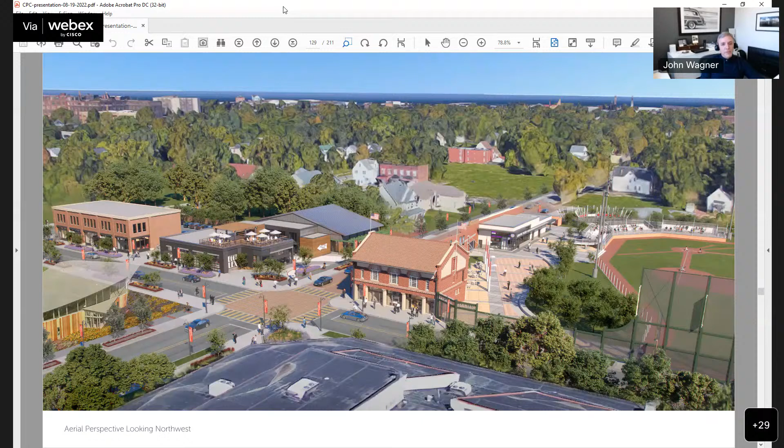Thank you. This is a wonderful project. I love the care that's been taken with the design and the materials. But with that, I will open it up to comments from other commission members.

Madam Chair, I move for approval with the conditions stated by design review. Thank you. Do I have a second? Second.

Will it be possible for us to get final approval? This is really necessary in order to move forward with the land bank transfer. I will ask Dr. McCray-Scott, would you amend or change your motion to state that? Absolutely, I will amend my motion to give final approval with the conditions outlined by design review. And do I have a second? Yep, second. Great, thank you for reminding me of that request.

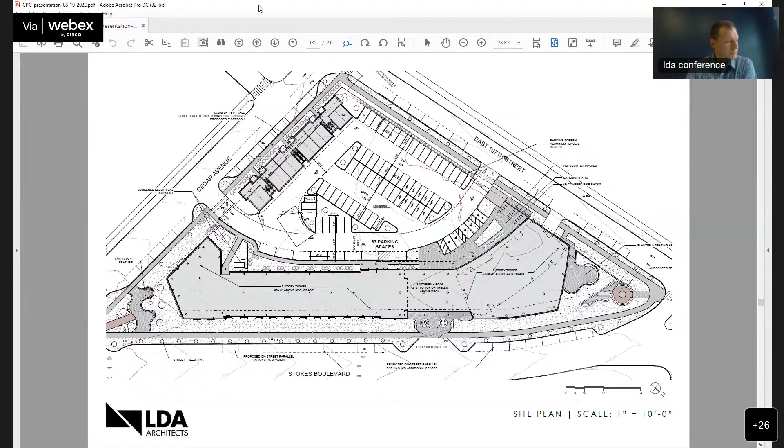Yeah, and Steve, we can just pause for a second. I know there was a comment or a question last time we were here about the affordable units. So I just want to reiterate that the affordable units that we include, that are dedicated low income restricted, the plan is to conform with all qualifications of fair housing in terms of how those units are selected and distributed within the building. They will not be all one unit type, they will not be all one floor, all one size. They will conform with all qualifications for fair housing. I know that had come up, so I just wanted to reiterate that again.

Great, go ahead Steve, next slide. As also previously mentioned, the main building will be LEED Silver and the townhomes will be LEED Gold. Next slide.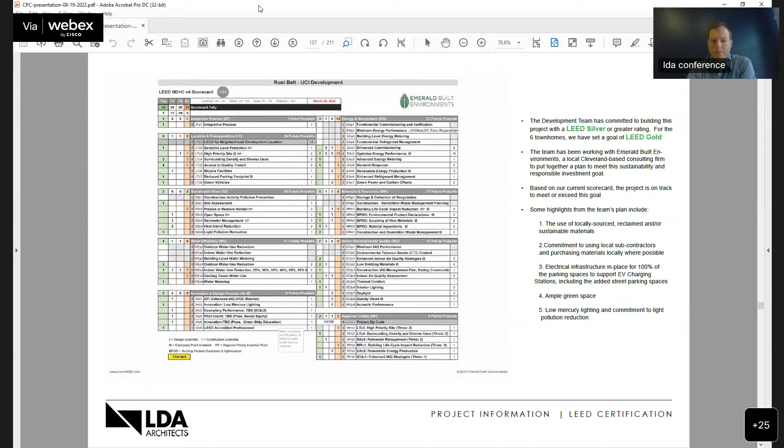So primarily the project is 3 materials. We have glazing, a large amount of it, especially at the corners of the building. In between, we have a terracotta panel system, which would also be a rain screen system. And then we have metal frames throughout the project, and this trellis component as well, which would be an aluminum product.

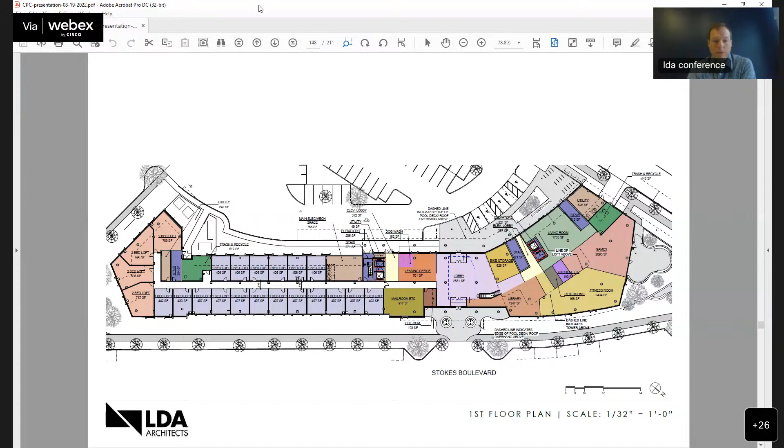This is the loft level, which on the north side has the co-working space.

We don't need, sorry to interrupt you, but just don't need to go through the floor plans too much. Okay, continue.

Third floor is all residential. Then the fourth floor is where we have the pool deck, and above that are the typical floor plans. On the roof plan, in the renderings, you might have noticed that the ends of the buildings pop up slightly higher than in the middle.

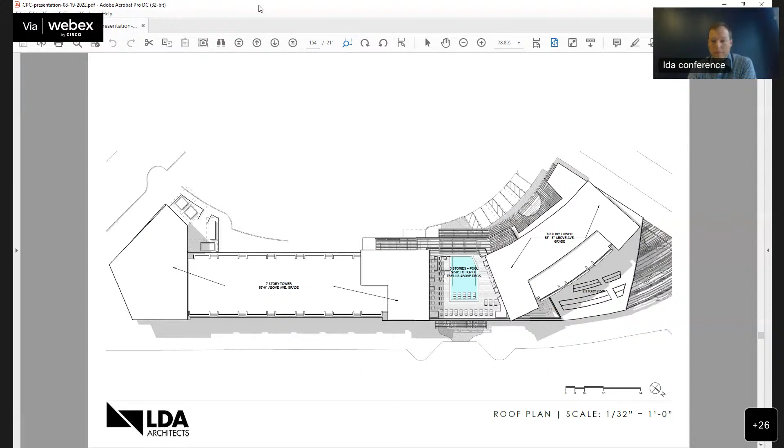I'd just like to reiterate on top that this was a discussion and a recommendation from Director Huang and her staff, and we feel like it adds a lot of character to these townhomes, and really plays well from the sidewalk view on Cedar.

Keep going. And then this is where we get into the detailed material stuff for the elevations. I'm going to go ahead and let Chris from LDA walk through these items.

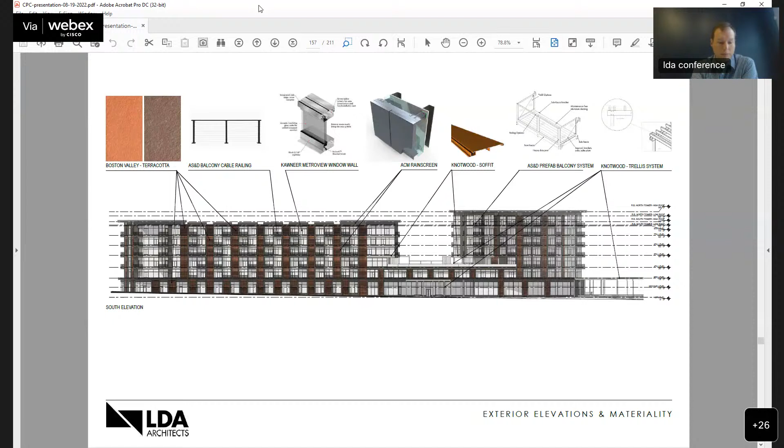Good morning, everyone. Just to be clear, I'm not sure that I got my cell phone off mute in time to swear in properly, so if I may now confirm that I will be telling the truth.

Okay, you're good. So the design overall is in large part a function of the floor plan. We have placed the larger units on the ends of each tower, and those have been given a bit more glass, as you can see here from the elevations, than the units in between. We have these pairs of bays that are generated by the studio units between them.

Steve also mentioned we have balconies, one that is Juliet style, which you see in the middle portions of each tower, again relating to the studios, and on the ends, a full depth balcony of about 5 feet that you can walk out on for the larger 1 and 2 bedrooms.

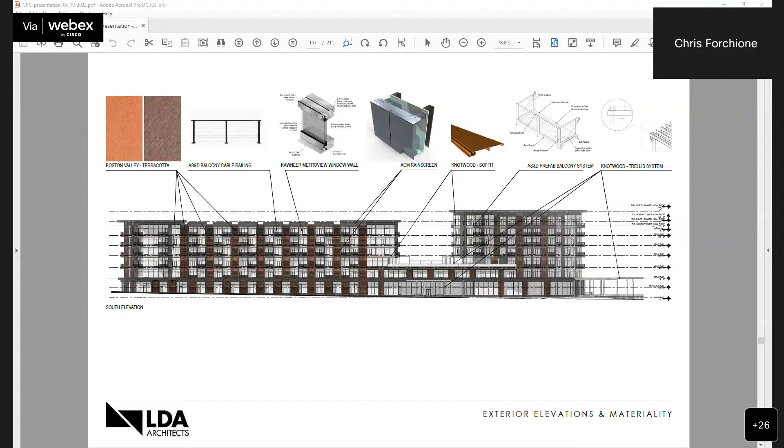Let's go to the next slide. Okay, so here you see...

I'm sorry to interrupt you, Chris. I'm not sure we need to go through each of the technical renderings since you've shown us the materials, if that's okay. I think we're okay. And you're coming back with landscaping and lighting, correct? Correct. And the public art component, yes. Unless commission members want to go into tremendous detail, I think we can move on, unless there are other site elements you want to show us on the material side.

Yeah, I would, if we could go to just one more slide. I think the next slide has an important detail.

Okay, so here's an enlarged elevation view of your typical bay where you have your studio units, and we have a mechanical system in which the terracotta has been designed to screen your traditional punched opening louver. We've tilted the panels. You can see the enlarged section view there in two different orientations, one to facilitate air movement in and also out. You'll see in the renderings and elevations that this will catch the light in different ways and create additional visual interest, as the louvers have been tilted from their typical vertical orientation along the wall. Thank you.

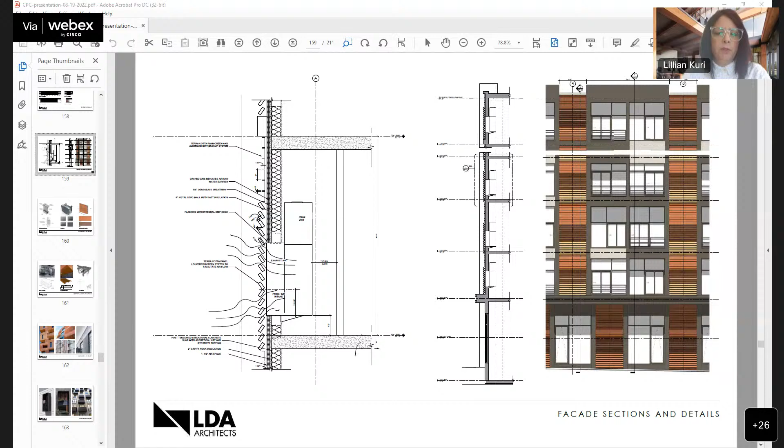Okay, commission members, any other questions, comments, or motion? And you're asking for final approval, correct? Correct, yes. Okay, commission members?

I'll move approval incorporating the comments from design review, with them coming back for landscaping and lighting. Thank you. Okay, we have a motion, do we have a second? I'll second. Motion and a second. Any other comments?

Okay, let's call the roll. Downing, yes. Fluker, no. Kuri, yes. McCray Scott, no. Slife, yes. The motion carries 3-2. Thank you very much.

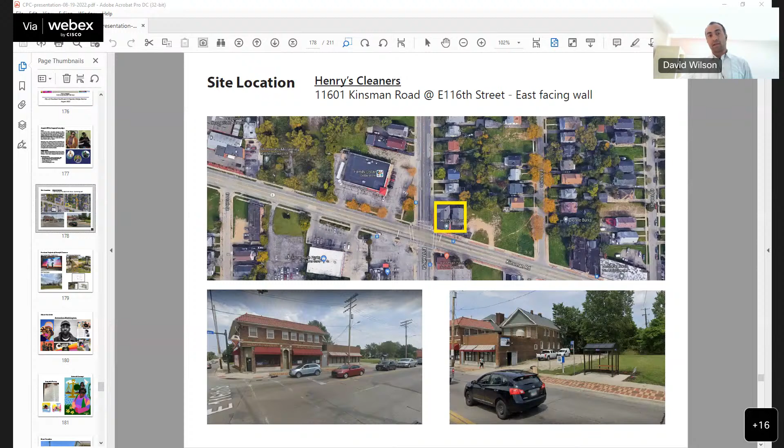Previous projects that have been done here include a mural on the west facing side of the building, installed in 2019 by Donald Black, and also ongoing green space improvements that Jackie Gillen herself had advocated for in her role at the Western Reserve Land Conservancy, including a tree planting and green space development in coordination with the RTA.

So I'm going to pass it over to Antoine to tell us a little bit about himself and to talk about the conceptual development of the artwork.

Thank you, David. Thank you, everyone, for allowing me to present today. I'm Antoine Washington, an artist here locally in Cleveland. My work is inspired mainly around and speaks to the Black American experience. I mainly paint and draw, I'm a fine artist.

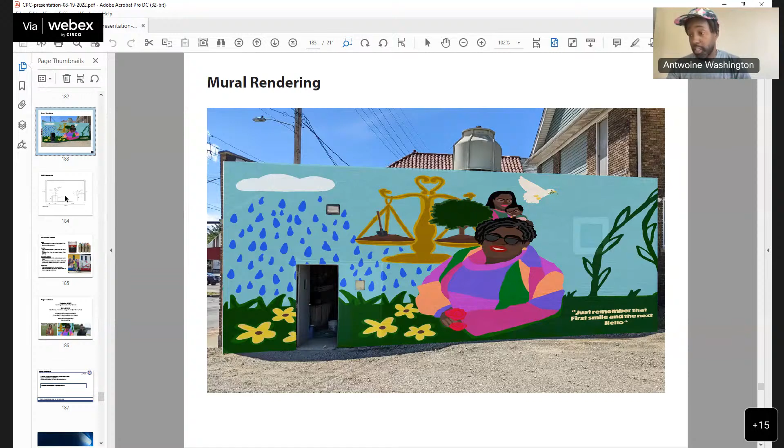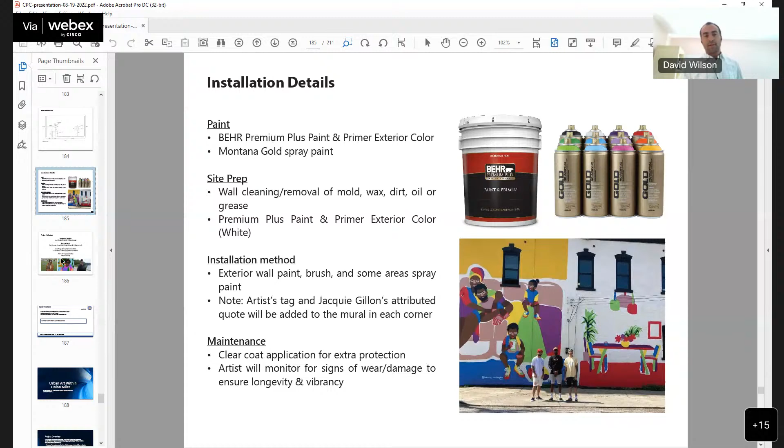To wrap up, it is 336 square feet, a painting on that side of the building. All of the surface will be covered, including the doors and the vent, but not the lighting. These are the materials that will be used for the installation. We're hoping, upon approval, to install sometime later this month, early September, for a September unveiling. Happy to entertain any questions at this time. Okay, thank you very much.

If I may make a comment and jump in. I first of all was really emotional when I saw this mural. Jacquie was a very special person to many of us. She mentored me for a short while, so I'm really happy to see this go forward. And Antwoine is fantastic. I'm so glad the family chose you, Antwoine.

Also congratulations to Antoine on his recent fellowship award as well. Amazing career, congratulations, important for Cleveland. You just have to hopefully stay here. That's all I have to say.

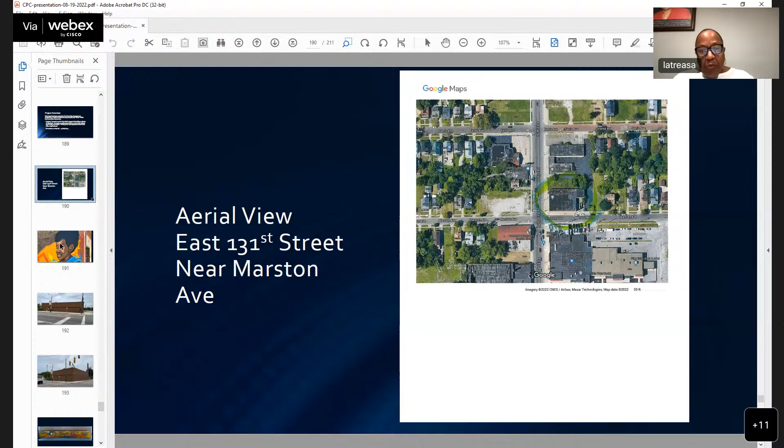Next slide, the aerial view here is at East 131st near Marston Avenue, it's circled. Next slide. This is sample artwork from the artist who will be doing the mural, Mr. Kevin Soul. He couldn't be here today. This is a sample at a barber shop and hair salon on 105th in Union of his work. Next slide.

This building here at 131st near Harvard is where the artwork, the mural, will be done. It's residential, the church owns it, and we do have approval from the owner. Next slide.

And this will be the mural on that building that was presented to you guys. It promotes unity for the youth and trying to keep them off the streets, letting them know that we do have a unified neighborhood and things like that. That's it. Any questions for me?

Commission members, any questions or comments? Thank you very much. We have a motion. Do we have a second? A second. Motion and a second. Can we call the roll? Downing, yes. Fluker, yes. Kuri, yes. McCray Scott, yes. Slife. Motion carries. Thank you very, very much. Appreciate it. We'll look forward to seeing this installed.

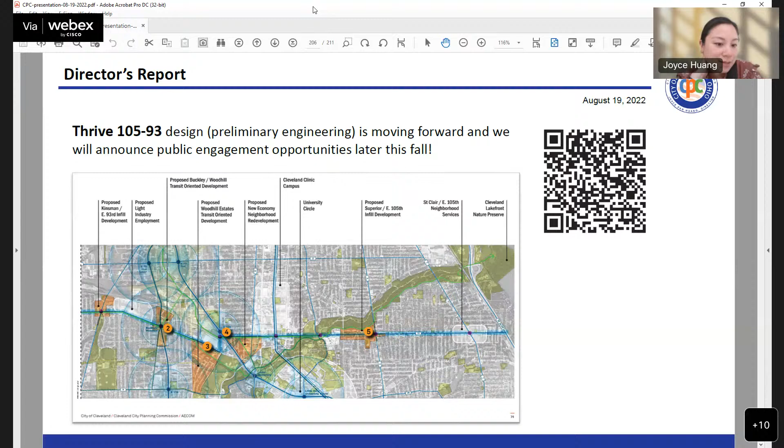All right, next slide. There has been a lot of curiosity about the Superior Midway, and similarly, it is going through the design process. The consultant is being onboarded through the state's Department of Transportation. They will be onboarded in January, according to ODOT's timeline. This is an opportunity to incorporate desired project elements into a much more specific design document, which will then go into engineering and construction documents.

We have been planning over the course of many months with our CDC partners how to do outreach to those in the neighborhoods, specifically in Asia Town and St. Clair Superior, in consideration of language access as well as on-the-ground outreach, as you mentioned, Member Fluker. We anticipate that construction will be completed summer 2025, fingers crossed. This is a standard construction timeline between detailed design, bidding, the award, and construction. So in 3 years, we'll have the midway from Public Square to East 55th Street.

Next slide. Yesterday, there was really exciting news that came forward. Calley Mersmann, our senior strategist for transit and mobility, has been working closely with Rob Mavec and others in our administration - Rob is the traffic engineer - along with the city council members, to install 10 radar speed feedback signs. These locations have been identified based on data and where there has been a lot of speeding, and these feedback signs will be rotated after some time. Then 14 modular rubber speed tables were installed at 9 locations and will continue to be installed over the next month. This is really exciting for us, as we know how important it is to keep our streets safe from people driving way too fast in their vehicles. We hope that this is just the start of adding more of these tools to help shape a safer built environment. Next slide.

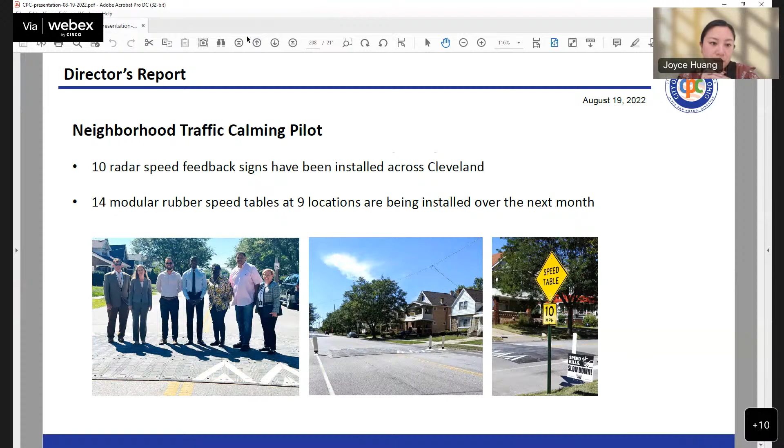Destination Cleveland continues the downtown public space survey. This is the last day to fill this out. We need to continue spreading the word, as you shared, Member Fluker. We do need much more diversity in responses. So, to the public watching, we encourage you to fill this out and share it with your friends so we can co-determine the future of our public spaces.

Some more general updates. Don Petit, our longstanding landmarks personnel, his last day at the City of Cleveland will be August 31st, and we are going to miss him dearly. There's so much to say about Don, but he served for over 30 years, and his shoes will be big shoes to fill in the Landmarks Commission. For those interested who work at City Hall, on August 30th we will be having a Don Petit Appreciation Day where you can come to the Landmarks Commission, share some words of encouragement, and sign a card for him.